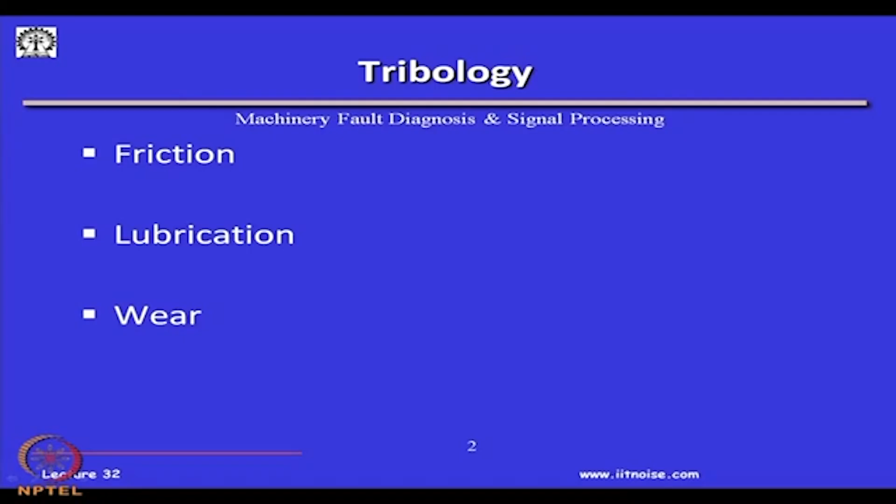As you know, tribology is the study of friction, lubrication and wear in mechanisms or machines. For example, when two machine members interact with each other, there is a normal force on them, and these surfaces may not be smooth, as I showed you in the case of bearings. They may have surface roughness.

Once these two components rub against each other due to the application of load, we put a layer of lubricant. The purpose of this lubricant is to reduce friction, because reducing friction between two meeting machine members means the forces or power consumed to move them will reduce. Friction can be reduced by closing these asperities in the surfaces by having lubricant here.

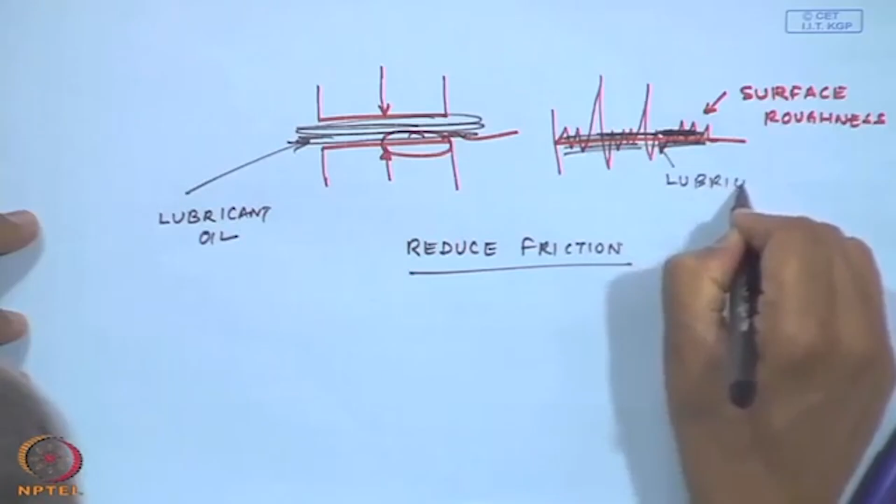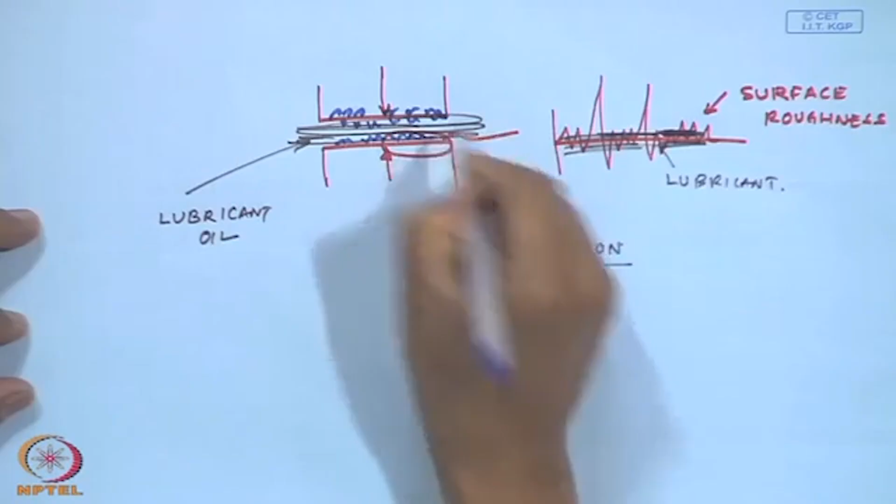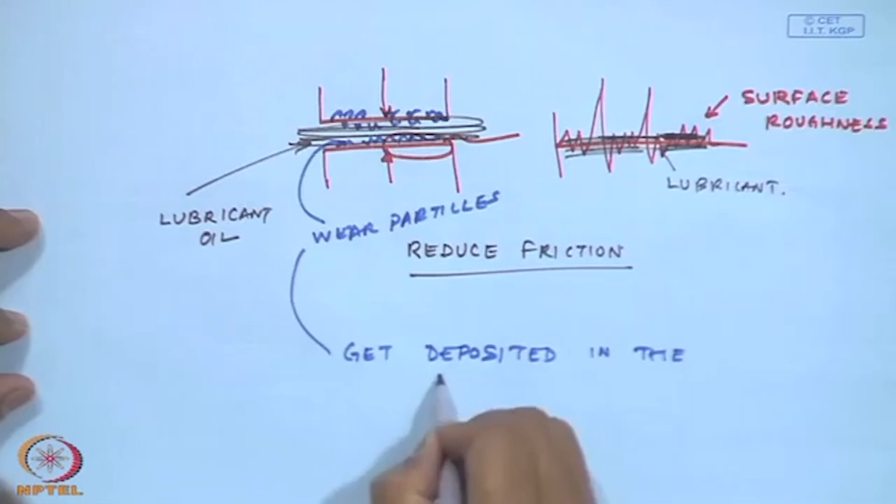But in the process, what happens? These particles also wear out because of loading, because of abrasion, and so on, and these particles get deposited in the lubricating oil.

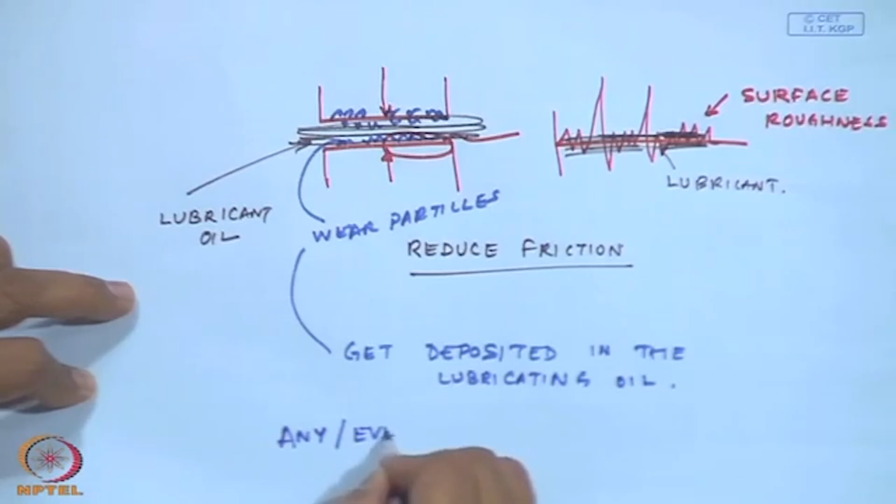So two very important things happen because of this process in any machine, in any or every machine meeting members. Example: gears meeting, shaft and a bearing, which could be a bush, journal, or anti-friction bearing.

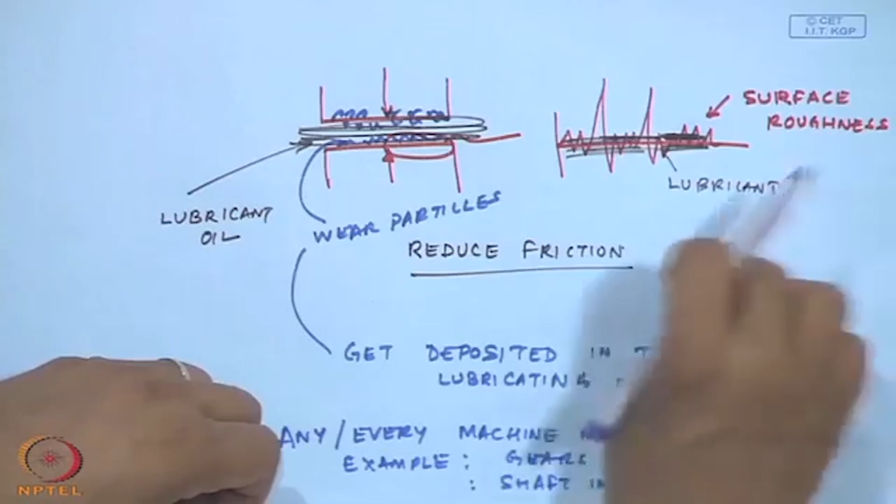When two materials meet against each other and rub against each other, there will be a lot of heat generation, and because one may be softer than the other, it is going to wear out. Like when you have an eraser rubbing on a piece of writing, those rubber flakes peel off the eraser.

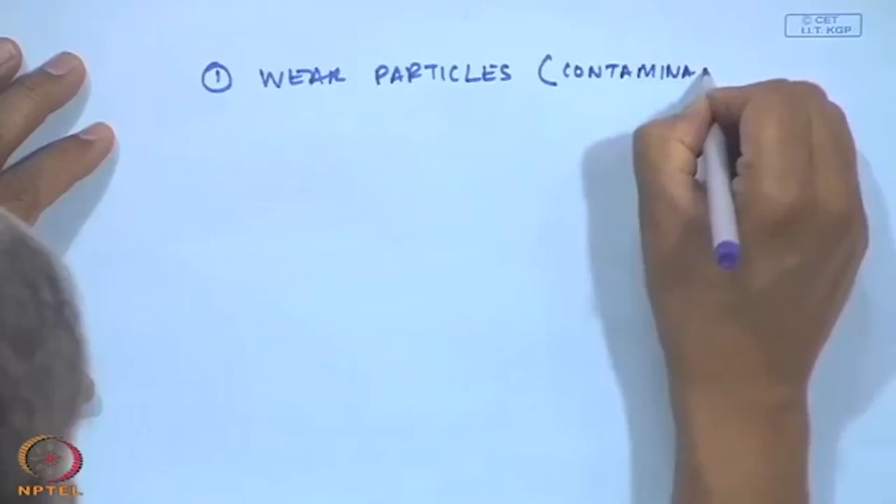So two important things happen. Number one, because of this process, the wear particles, or which we call the contaminants, get deposited in the oil.

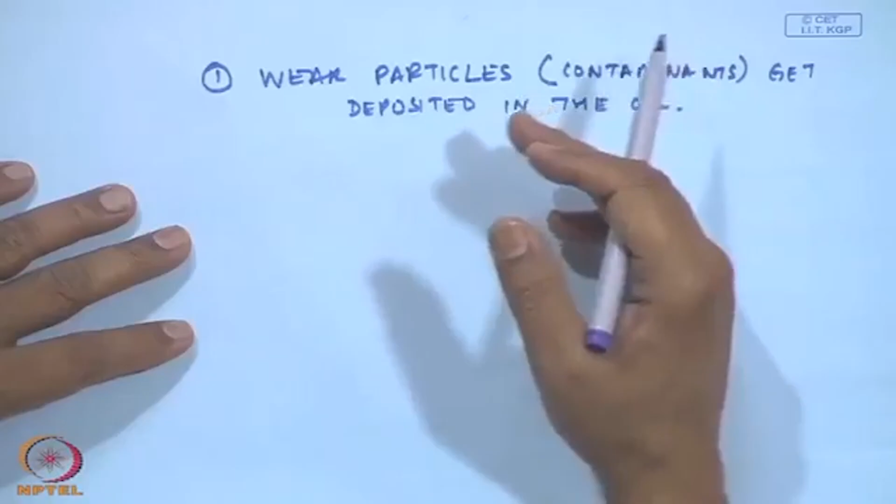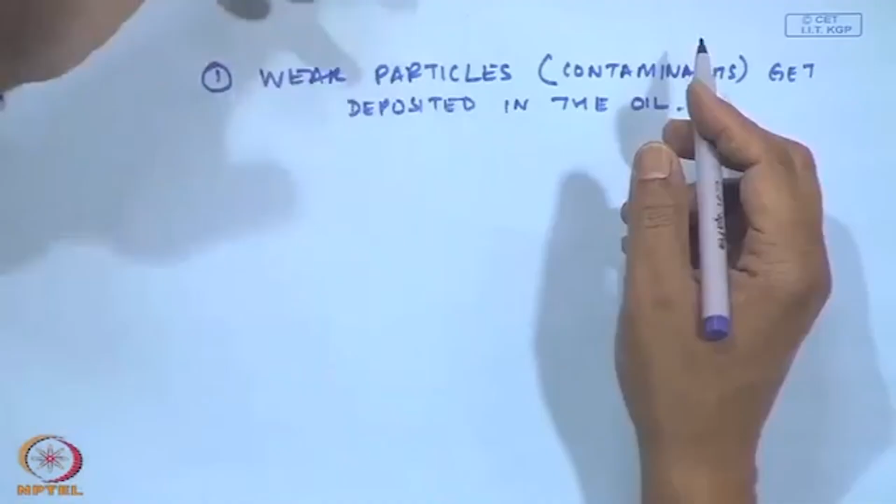The concentration of the wear particles, the nature of the wear particles, and the rate at which they have been deposited in the oil give us clues as to what is wrong with the parent material from which they have worn out, whether due to excessive load, less lubrication, or temperature effects. These are factors responsible for the wearing out of particles from the mating members.

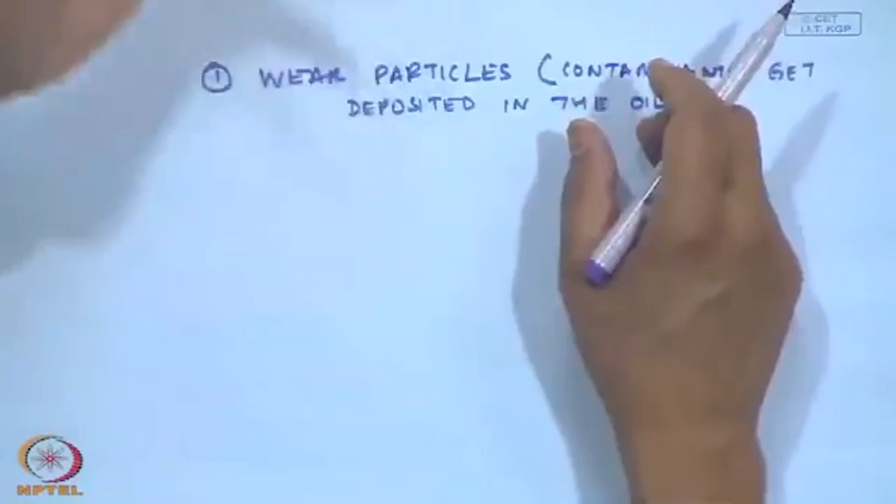Understanding where these wear particles came from, we can know whether the parent material was poorly designed, was of a softer material, did not have proper heat treatment, was not lubricated, or was subjected to higher temperature. These are scenarios we need to investigate, along with the chemical composition of the wear particles. For example, if they come from a journal bearing and we see a lot of zinc, tin, or lead, we know this bearing is wearing out faster than it is supposed to. This gives us an indication of how and how quickly the machine is deteriorating.

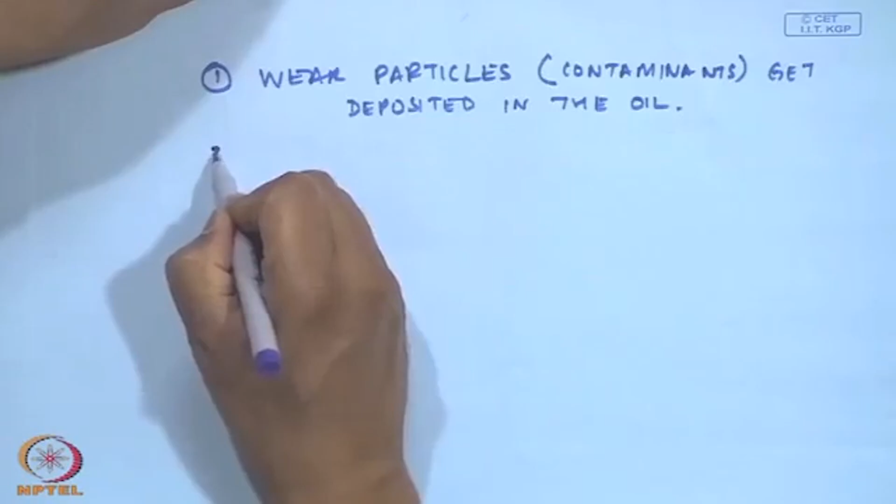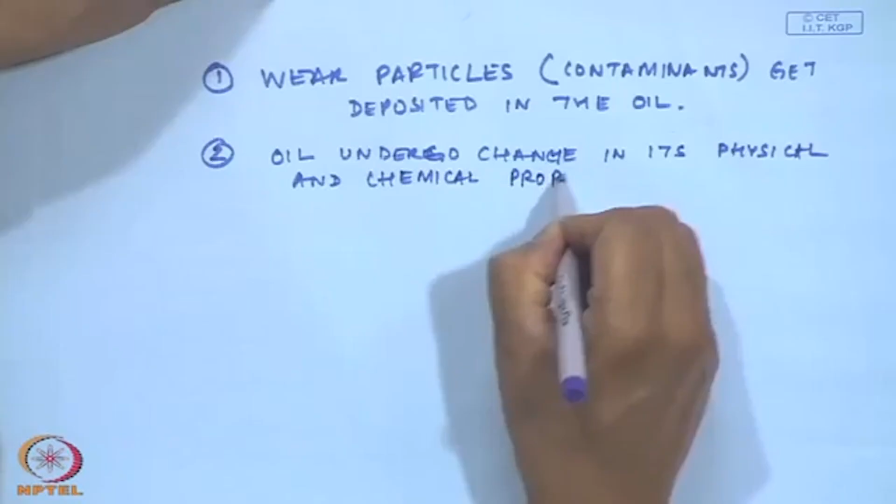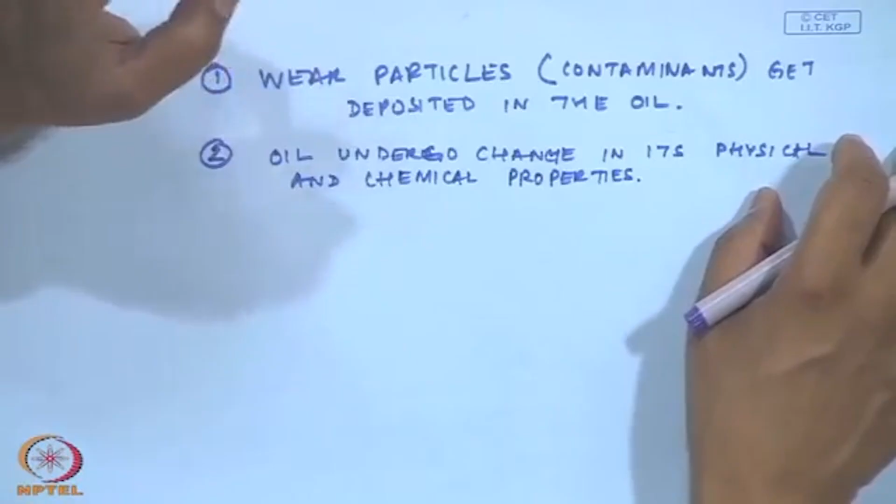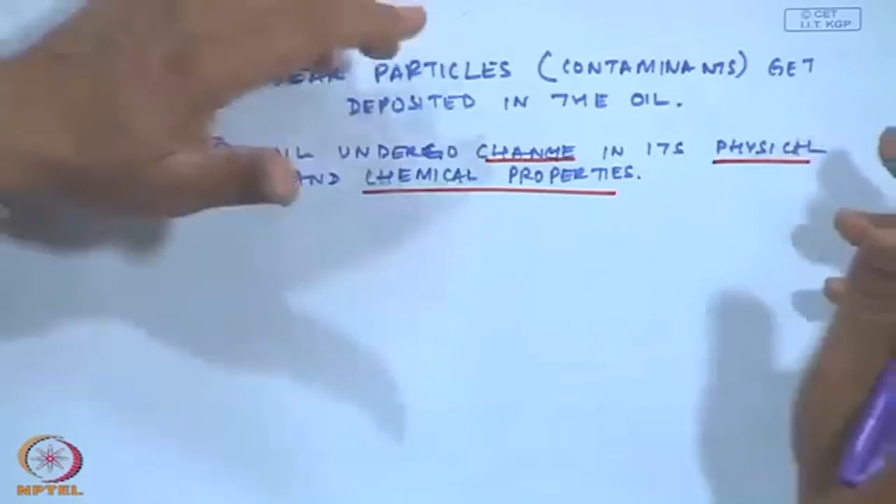The next thing that happens is, once these wear particles get deposited in the oil, the oil will undergo a change in its physical and chemical properties, because the virgin oil, the oil which was new and has not been used in the machine, has certain physical properties like density, viscosity, and oxidation number. Once contaminants get deposited in the oil, these properties are going to change. So if somebody monitors these properties, we will know that something has gone wrong with the machine.

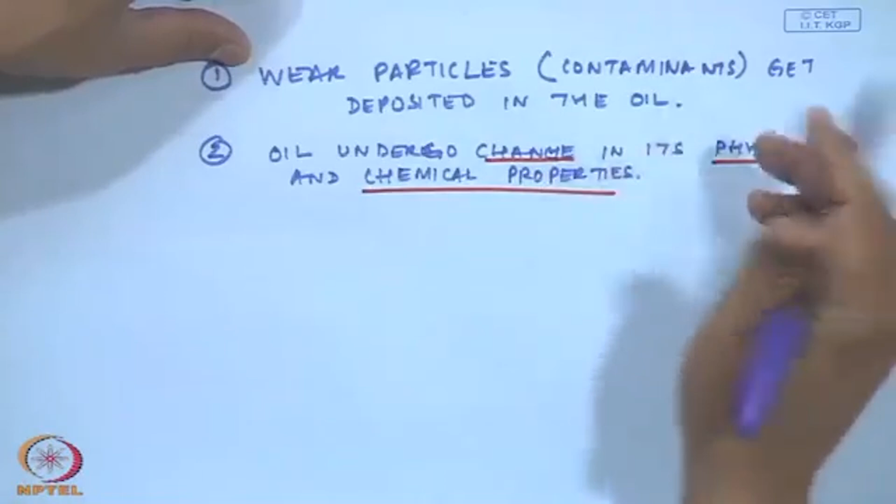This contaminant analysis, which we are going to discuss in today's lecture, and the oil analysis in the subsequent lecture, are basically like pathological tests which we do when we go to the doctor, like an urine analysis or a blood sample analysis.

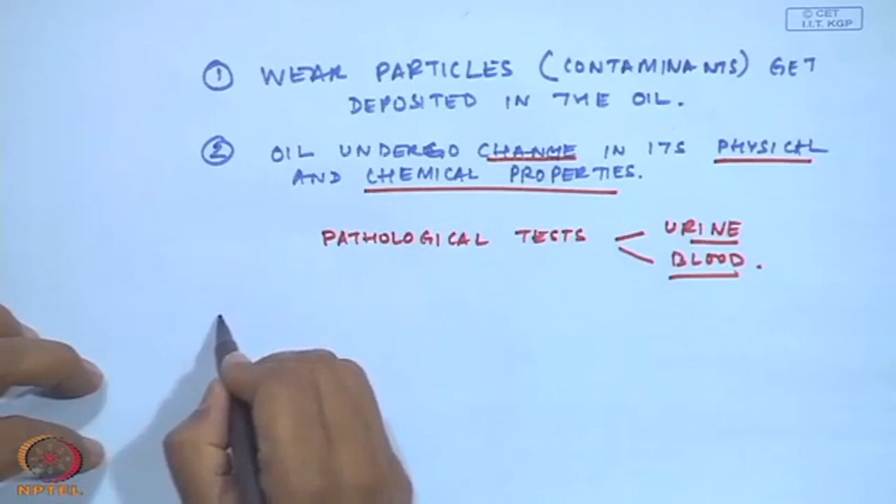Similarly, for machines, we also need to look into wear particles and oil analysis. Throughout the world, 70% of CBM, condition based maintenance, is done through vibration monitoring.

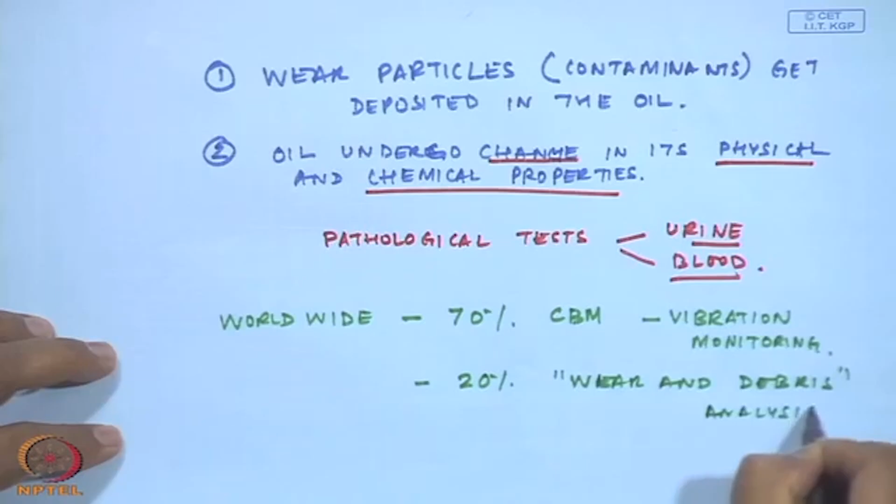These are from statistical information available in the literature. Usually 20% is what is known as wear and debris analysis, which is essentially nothing but the contaminant analysis.

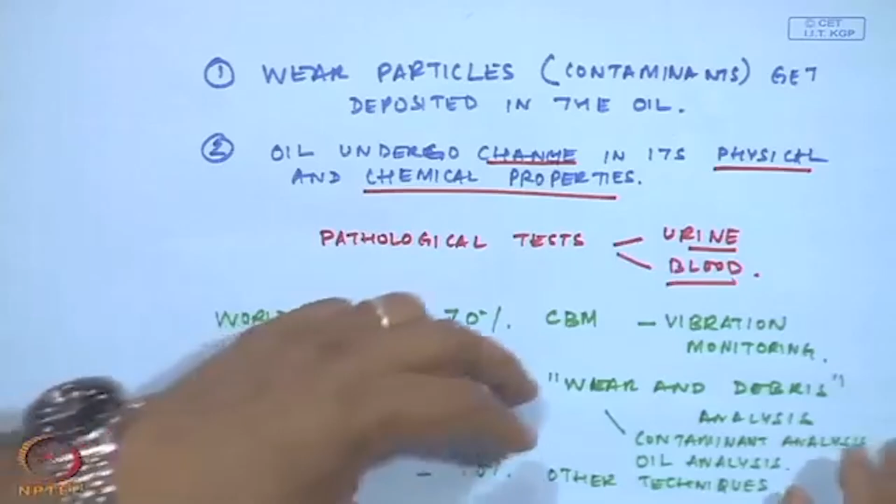And oil analysis. The remaining 10% is other techniques, and that makes it 100%.

So in this other techniques category, I have what is known as the motor current signature analysis.

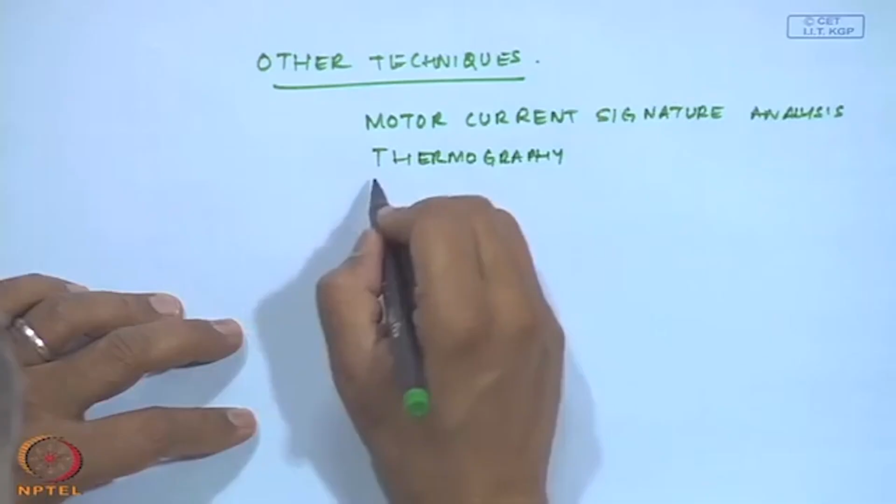Then we have what is known as thermography. Then we have ultrasonics. Some of them are non-destructive test techniques like X-ray or radiography, acoustic emission.

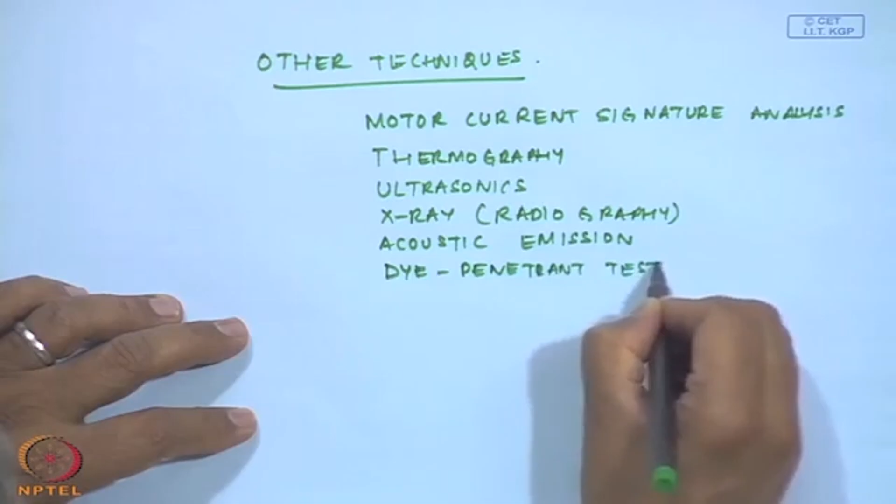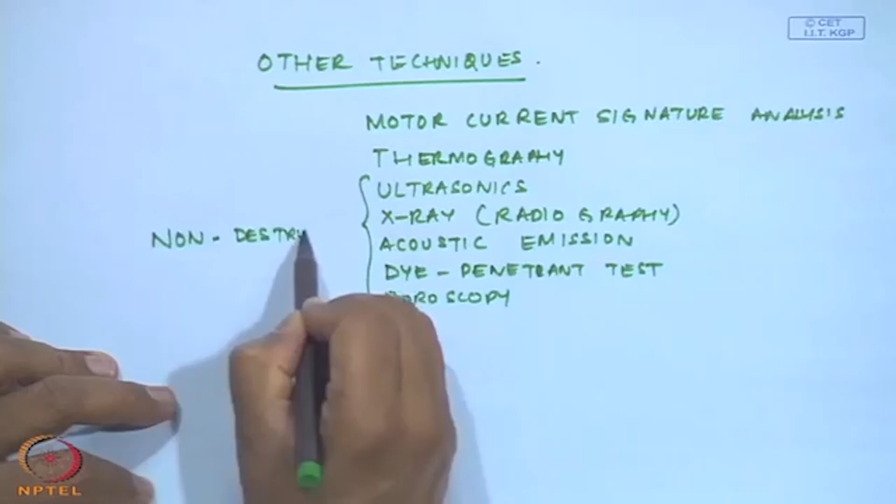Then we have dye penetrant test. Then we have boroscopy, etc. These are the non-destructive tests, NDT. So this forms about 10% of the CBM throughout the world.

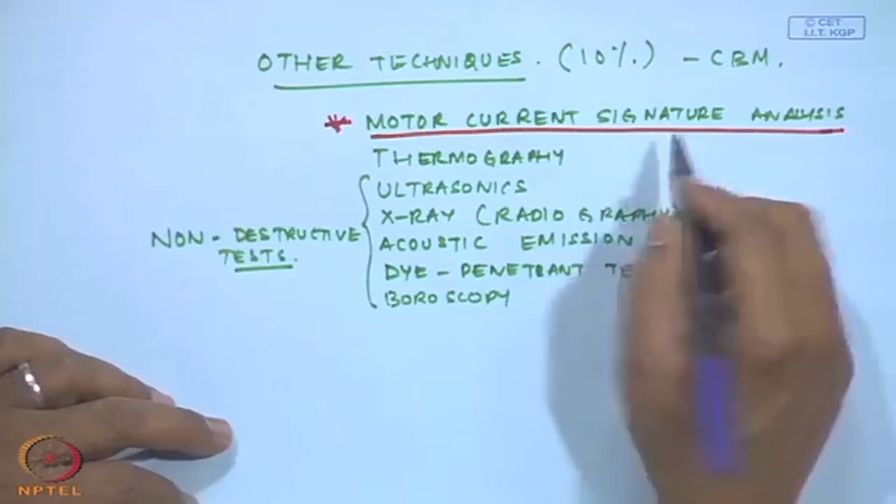Recently, motor current signature analysis has become a leading technique in finding out CBM, and we at IIT Kharagpur have done some pioneering research in motor current signature analysis to find out faults in mechanical systems using the current drawn by the electrical motor which is driving either the gearbox or the mechanical driven unit.

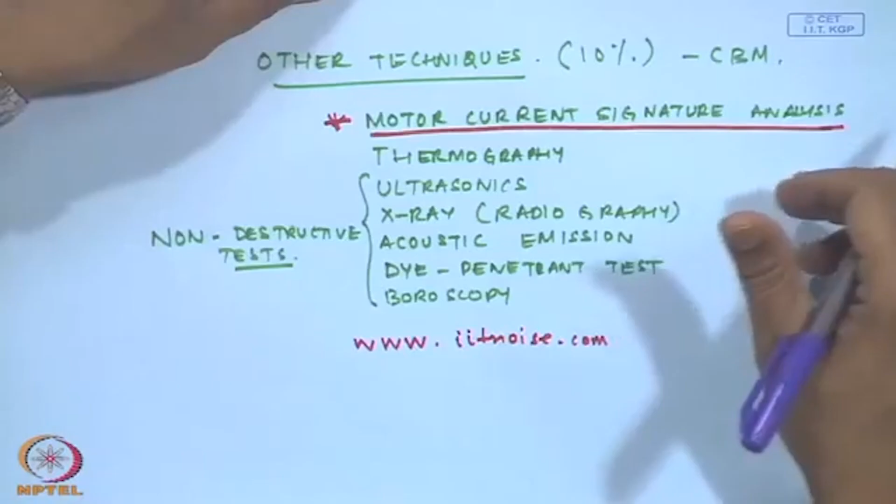Details about this research can be found on my website. And in fact, in subsequent classes we will refer you to some of the experiments and literature which we have published in these areas.

So today, as I was telling you, we will focus more on contaminant analysis in this class. With this kind of preview, let us see what this contaminant analysis is about.

As you will see here, the contaminants or the wear debris have certain characteristics. One is the quantity. If the quantity is high in a given composition, it is usually measured in parts per million, ppm.

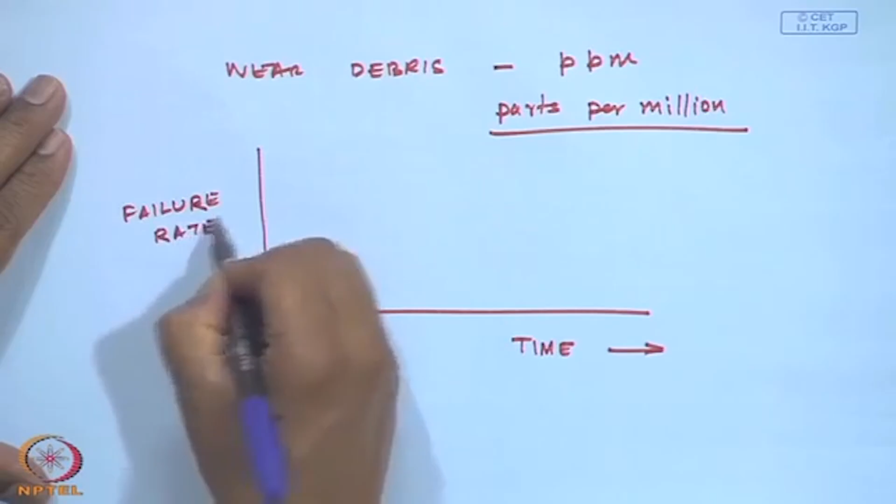If you go back to the familiar bathtub curve, you have the infant mortality zone, then the uniform failure rate, and then towards the end you have the wear out zone.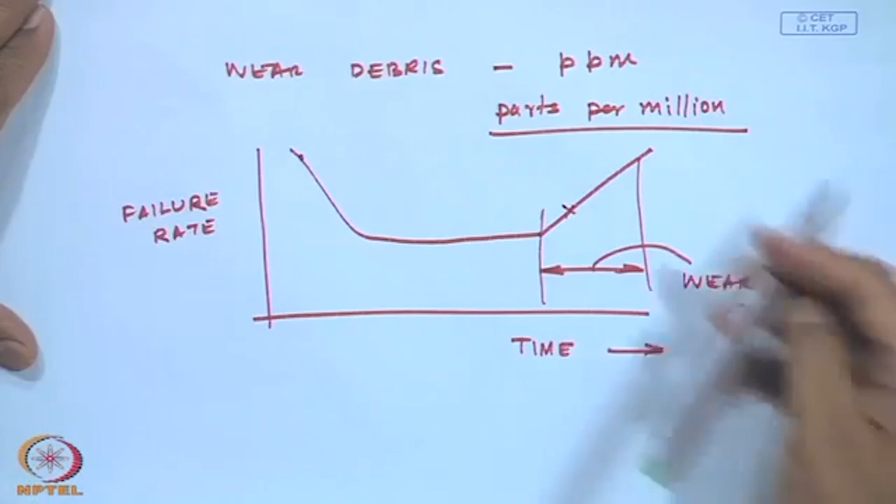What happens is, suddenly at a given time, if you see that the wear debris parts have increased, are increasing with time, you know that the defect severity has increased.

So, in the laboratory where you do the contaminant analysis -- by the way, this contaminant analysis cannot be done in situ, that means next to the machine. Unlike vibration monitoring, where you just put a transducer next to the machine and record the signal and do an analysis to tell where the fault is.

In contaminant analysis or oil analysis, you cannot do that. All you have to do is collect the oil, like collecting a blood or urine sample, and send it to a pathological lab. Similarly, you collect the oil in which the contaminants are present and give the entire sample to a lab, where they will check the severity by calculating the quantity of particles present.

For example, every month you see the ppm of, say, zinc in a machine component. So at the end of the first month, second month, third month, fourth month, fifth month, after every month you will be collecting the oil sample and giving it to a lab.

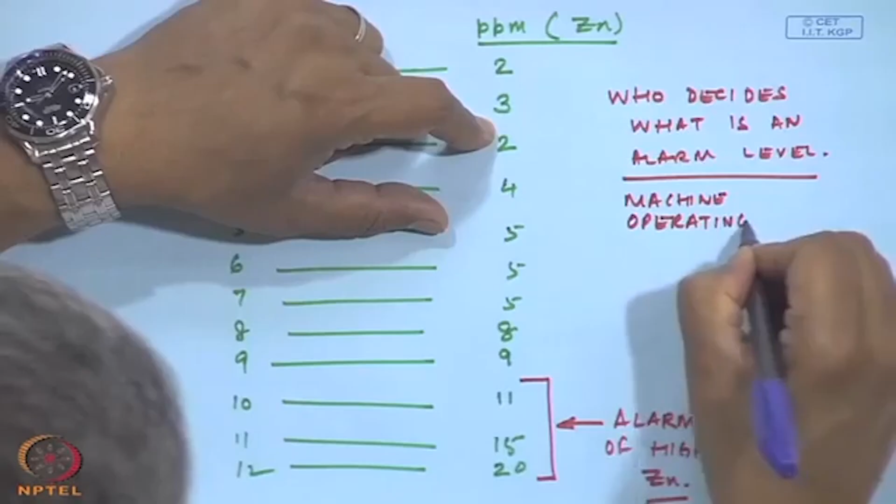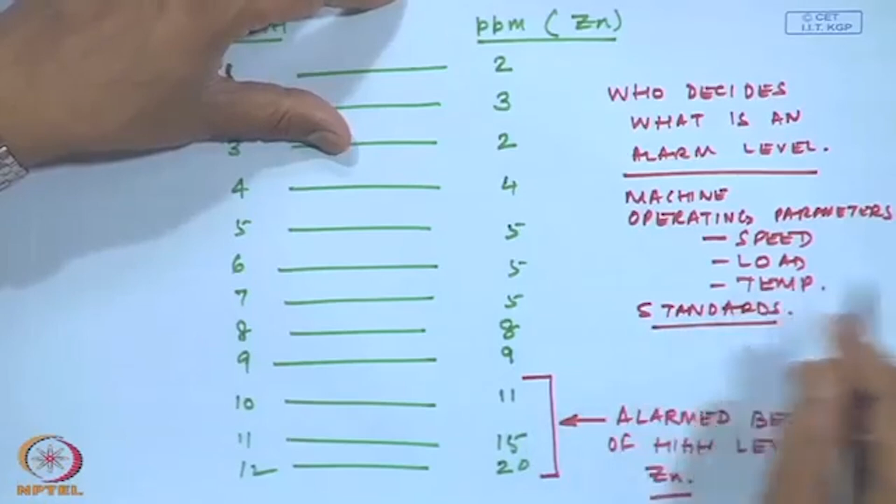Like speed, load, temperature - the machine could be a gearbox, blower, etc. For these there are standards, or industries have made their own standards based on their experience. They say if I get more than 15 ppm of zinc, I should be alarmed that the machine has undergone a severe failure. So this severity or alarm level is actually decided by the user himself or herself.

Now the next point is size of the particle. We are getting size of the particles. This wear debris comes in many forms. One could be laminar strips, one could be irregular shaped particles, one could be spheres. Some could be curled strips.

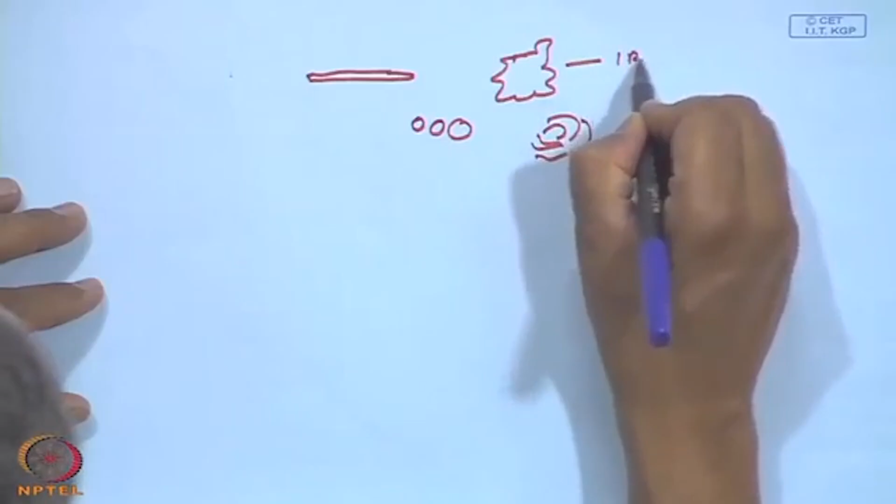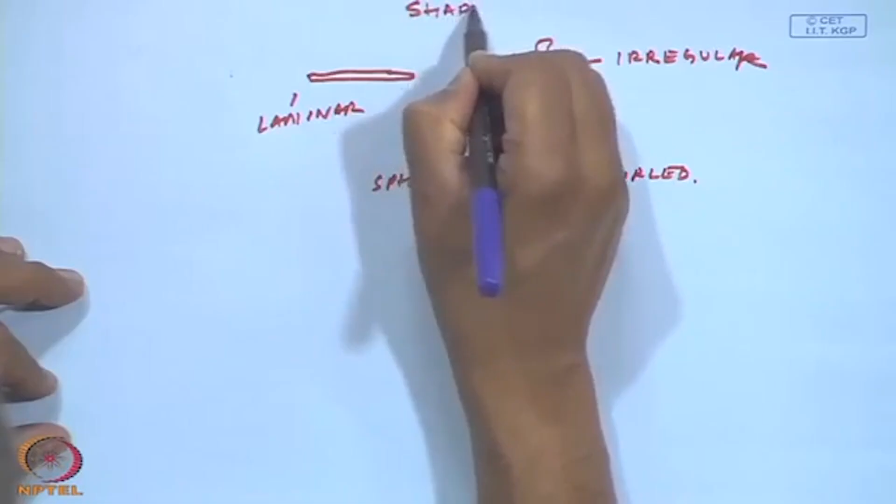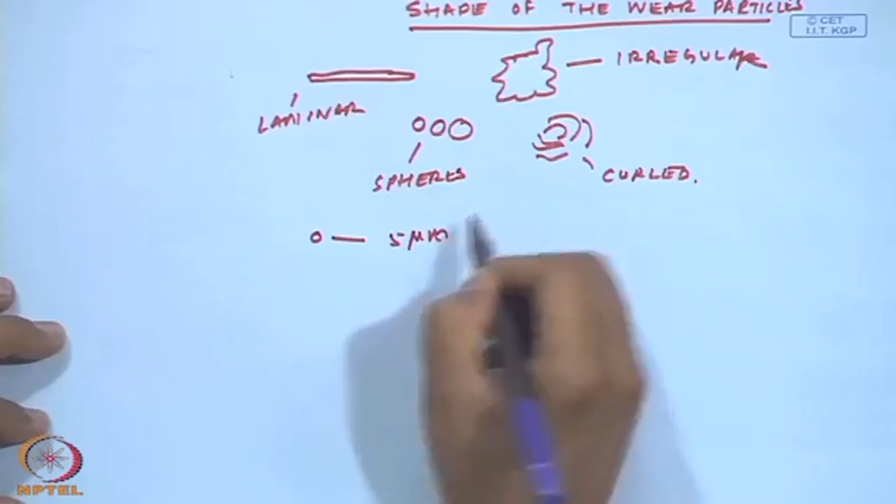Because this actually leads to the morphology of the wear particles, but the rate is very important, because what will happen, we have some having maybe 5 micron size. Suddenly, if the surface has worn out so much that I am getting large boulders, large spheres.

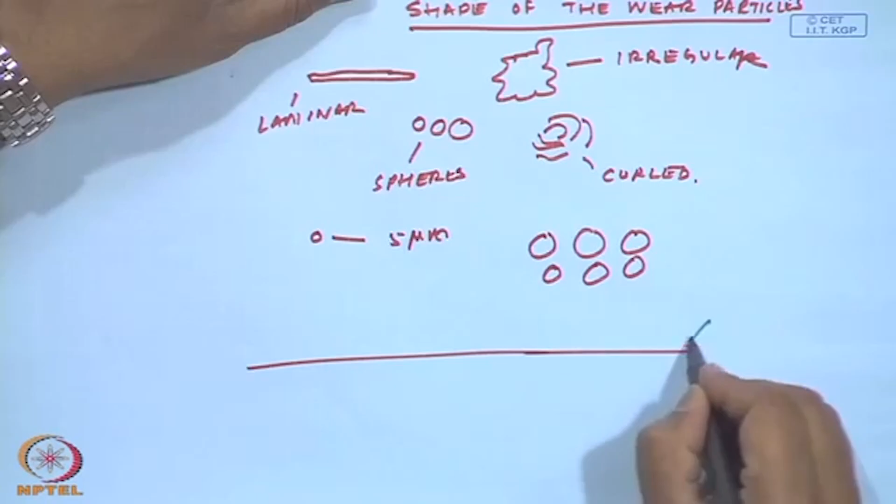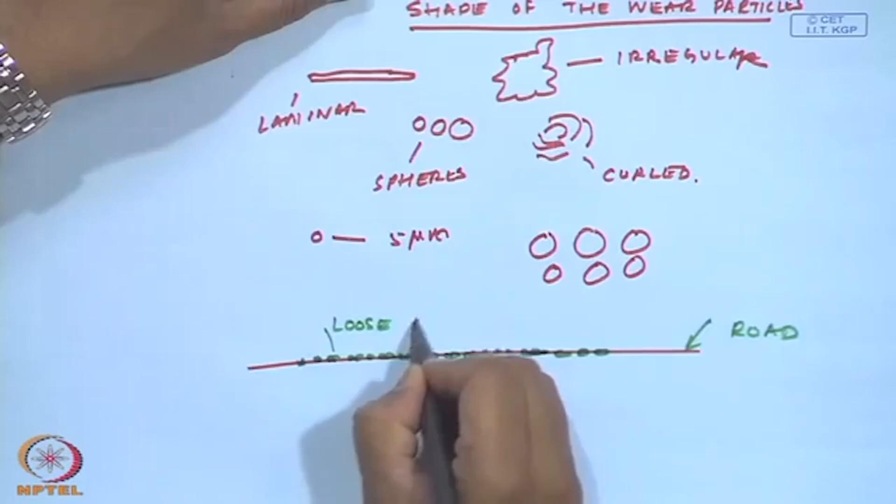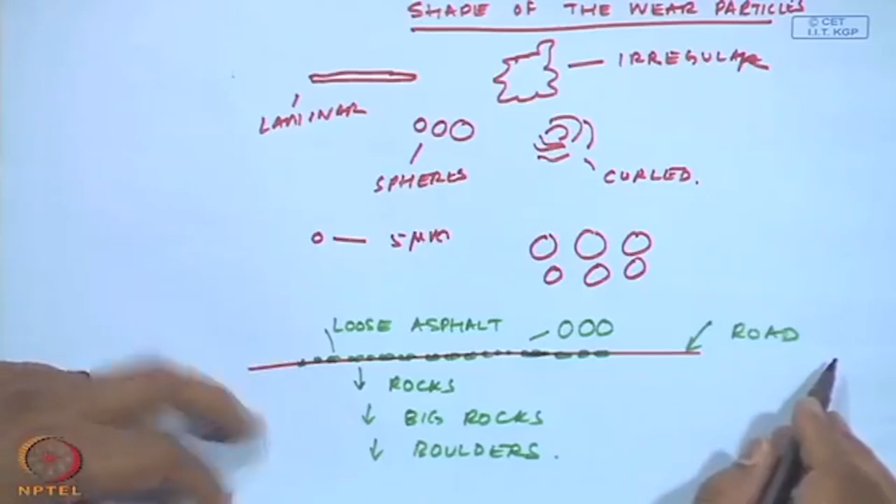A good example of this is a fresh road, nicely metaled, and then initially you have a lot of loose asphalt. With time you will see suddenly you get big chunks, big spheres, big rocks - loose asphalt, small rocks, then big rocks, then boulders coming out. If you do not treat this asphaltic road, with time, because of weathering conditions, you will initially have loose asphalt coming out, then gravels and rocks, then big rocks, followed by boulders.

Similarly, the same thing happens in machines as well. You will have small strips coming out, small spheres coming out. If it goes untreated, you will have big components coming out, big spheres, and so on. So the size will decide the rate of severity of this wear debris. With time you will see the particle size, maybe it was 5 microns to begin with, and then it became 20 or 10 microns, and so on.

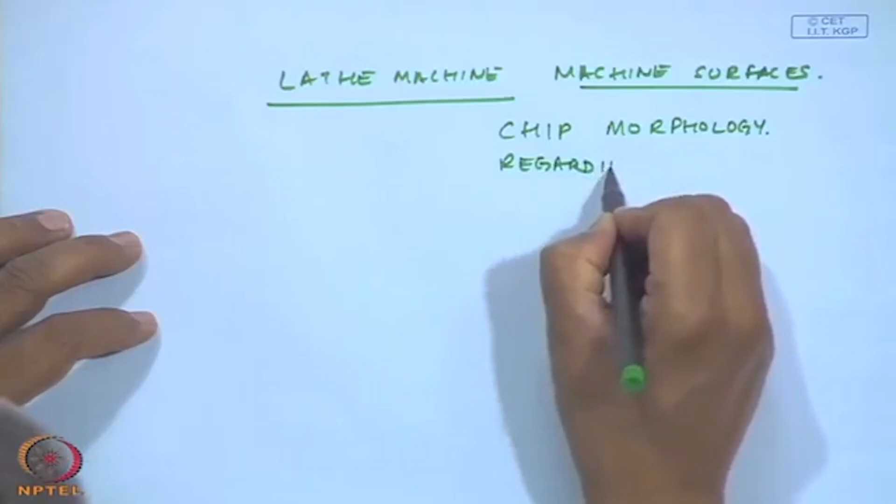Next is the morphology - the mode, whether the shape is laminar like strips, whether it is curled, whether it is sphere, whether it is irregular. You must have noticed this while you machine in the laboratory, in the workshop, when you use a lathe machine to machine surfaces. The chip morphology tells us regarding the type of machining.

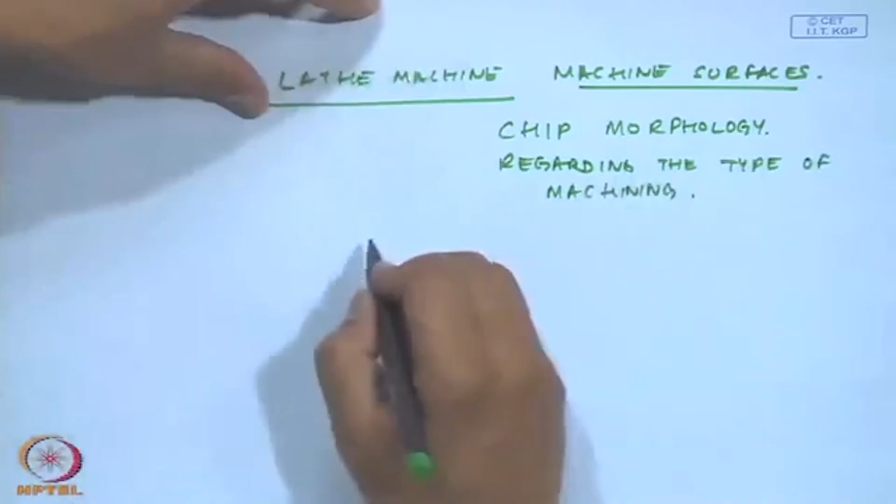I am sure all of you must have seen while you machine a mild steel specimen, you will get curled chips. When you have cast iron, you will get broken pieces. There is no continuous strip here, but here you will get broken steel.

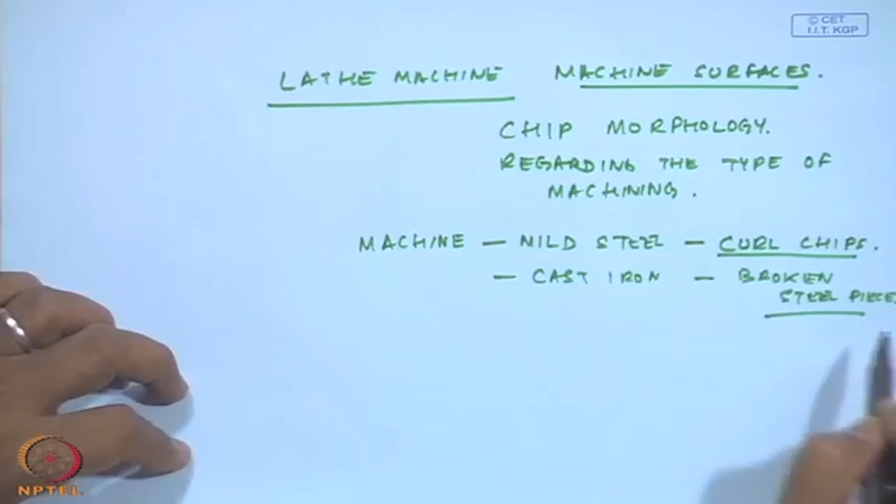So this tells us about the operation. Of course here we are making it happen, but in machines, because of wear and tear, we will get these particles coming out. Some particles could be like a sphere, some could be like a strip, some could be curled or curved, some may be having a lot of holes on them, and so on. Depending on the morphology of these worn out particles, of course we cannot see them with our naked eyes, so we need to use an optical microscope to begin with, and then magnify them to see them.

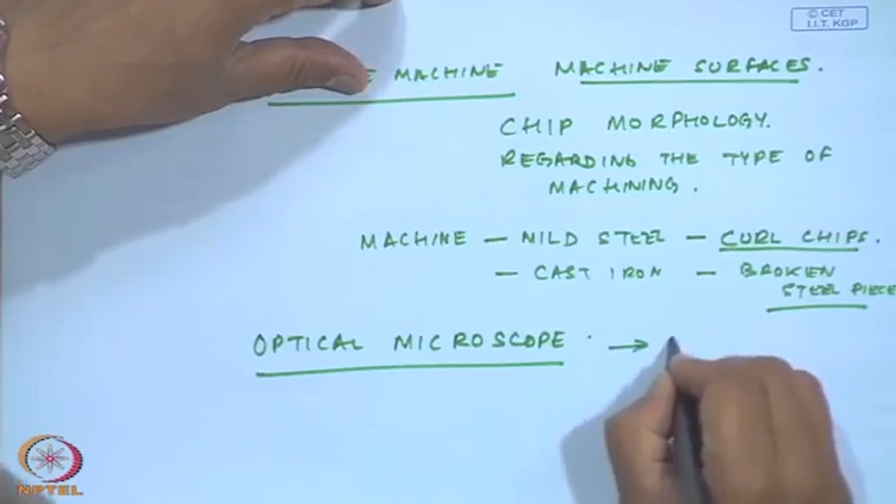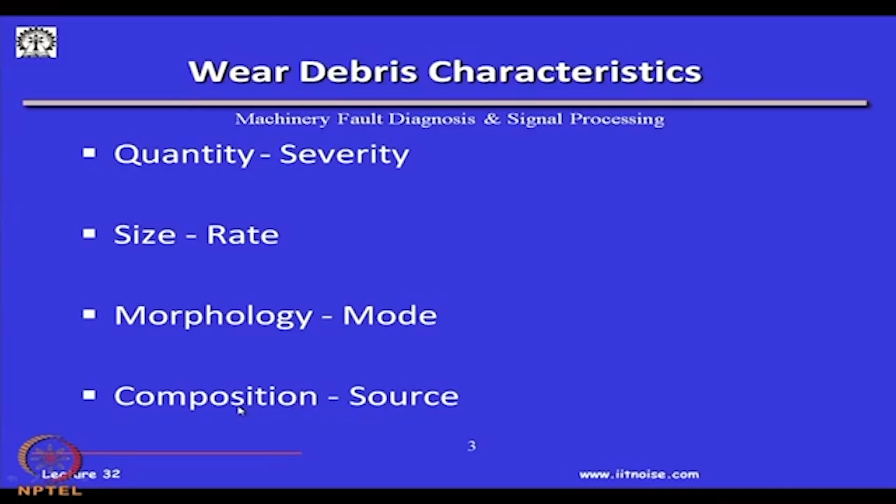And then the most important part is the composition of the wear debris particles. The composition of these wear debris particles will tell us what is the parent material in terms of composition, whether it is a lot of iron, zinc, chromium, sulfur, or silicon. We know, for example, a good example is silicon - the sand grains or the dirt actually have silica. Suddenly if in the contaminants I find a lot of silicon or sand grain coming up, I will know that a lot of foreign dirt has gone into my machine.

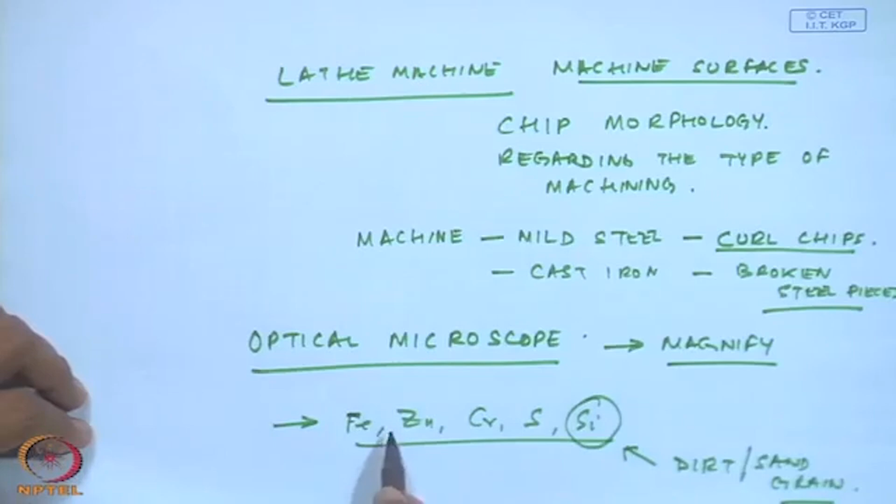So these are telltale signs. If I know the parent composition of the material and I know that in my wear particles a certain element's composition is increasing, I know in a given machine from where this particle has come out and which component in this machine is deteriorating. That knowledge will be known to me.

So these wear mechanisms are many. For example, when the particles are meeting, one may adhere to another because of temperature, because of load, and then because of rubbing they may try to pull out the surface of this material. There could be a lot of abrasion because one is hard, the other is soft, and they could act as an abrasive. This abrasion happens in normal machines, it's not that this is bad - it happens, the only thing is whether the rate at which they are happening is more, and whether I could do something to arrest them. For example, if you think of a journal bearing, the inner liners are much softer than the shaft material.

So, in the process of operation, this shaft being a hard surface is going to wear out the inner bearing surface. Now, imagine if this inner bearing surface is wearing out faster, the bearing's clearance is going to increase. As this clearance increases, the ZN by P ratio is going to change, and from the Sommerfeld equation you will see that the load carrying capacity of the bearing is going to reduce.

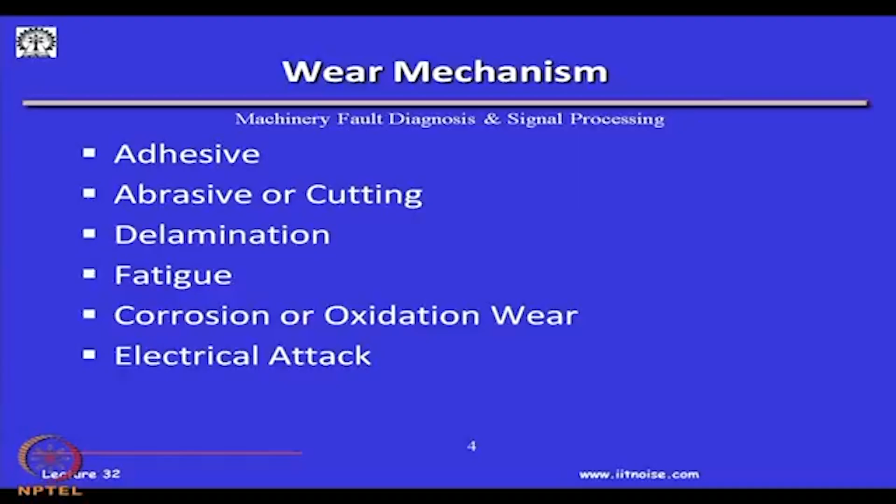Particularly think of the case of an electrical motor. There is a rotor, this carries a rotor, and of course there is a stator — I am not drawing the stator here. What happens because of this, there is always a small amount of voltage loop which is going on.

Now, at this interface there is a lubricant, either if it is a journal bearing or a ball bearing, there is a thin layer of lubricant between the inner races, outer races, etc. And this actually acts as a dielectric. So when I am bringing in a voltage across this like a capacitor, with the dielectric, if this dielectric breaks down, this voltage is going to get passed through.

So this intermittent passing of the EMF will create a spark, because there is a potential. This sparking comes with high energy of heat, momentarily. This is going to produce a lot of pitting on the surface, pitting on the bearing surface. I will show you in the next class some pictures of what happens when bearings pit. So a lot of pitting marks will come on the walls of the inner race or the outer race, because of an electrical discharge going through this circuit.

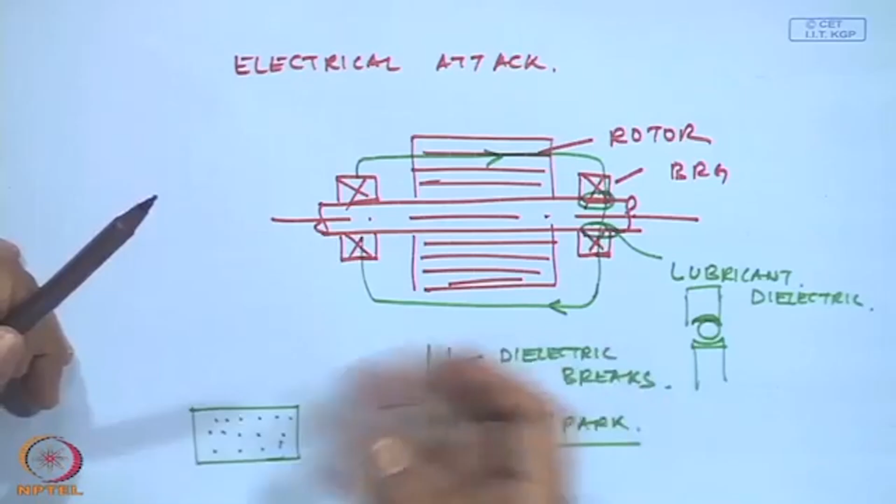The usual way to avoid it is to have a good grounding. If you ground it, this does not happen. I will show you some examples. But these are responsible for the initiation of pitting, and once the surface has got pitted, because of load and temperature they are weakened, and with time this small pitting will become large, and scuffing will occur, and then large chunks of material are going to get eroded. So the surface is going to get worn out again.

So one has to be very careful when designing electrical motors, or particularly when you have high voltage electricals in your machinery, wherein there are parts with lubricant and then a discontinuity of contact. We may not get a voltage as we measure it, but when they are going at high speed, because of this EMF, if the grounding is not proper, we will get sparks, and these sparks are responsible for erosion, like an electrical discharge machining effect occurring. In fact, people use these high voltage sparks in electrical discharge machining to machine surfaces, but here the same EDM effect may be harmful to our machines.

But these wear modes — when we have the initial infant mortality zone of the bathtub curve, you usually have running-in wear modes, because maybe it was not properly aligned, maybe the surfaces had a lot of bad surface finish, a lot of the machined surfaces were not clean, and these debris were there. This is then followed by a steady wear, and then we have the wear out towards the fag end of the life of the machine. We will have severe wearing out, followed by pitting, and if pitting goes unnoticed, we will have large materials coming out, which is known as scuffing.

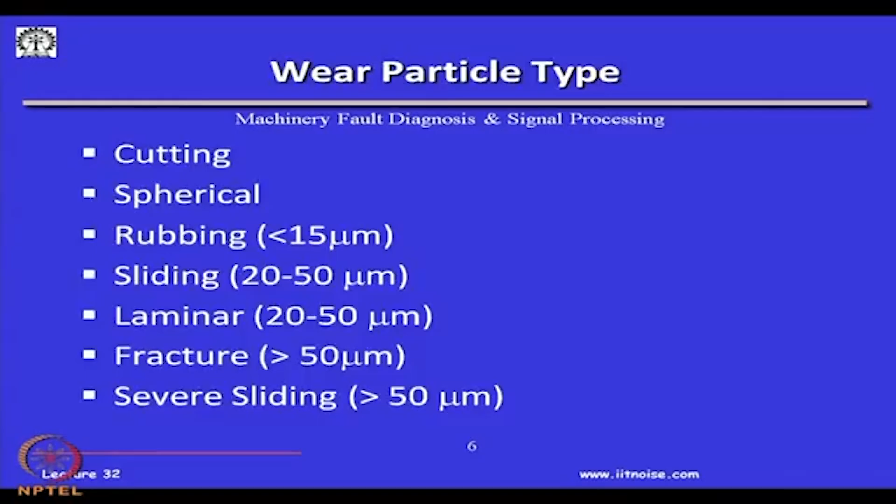So what we do basically, there is a technique. Now if you look at this contaminant analysis, depending on the size of the particles, we can have different modes of investigation.

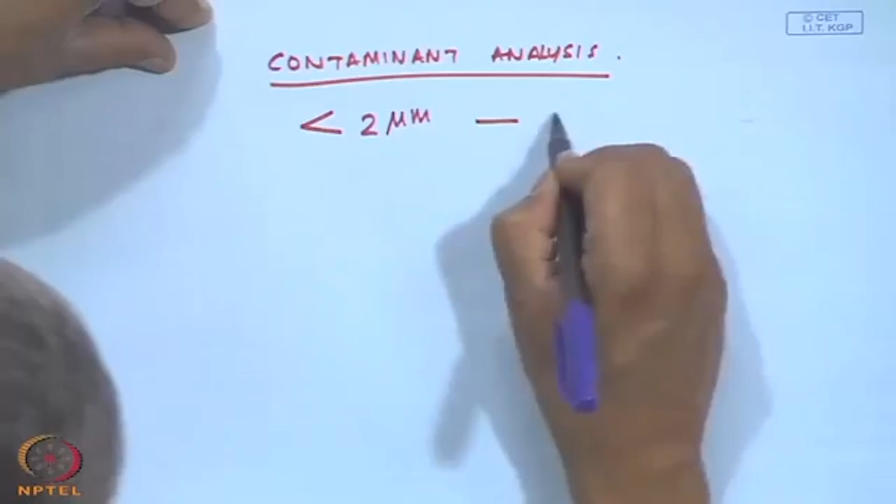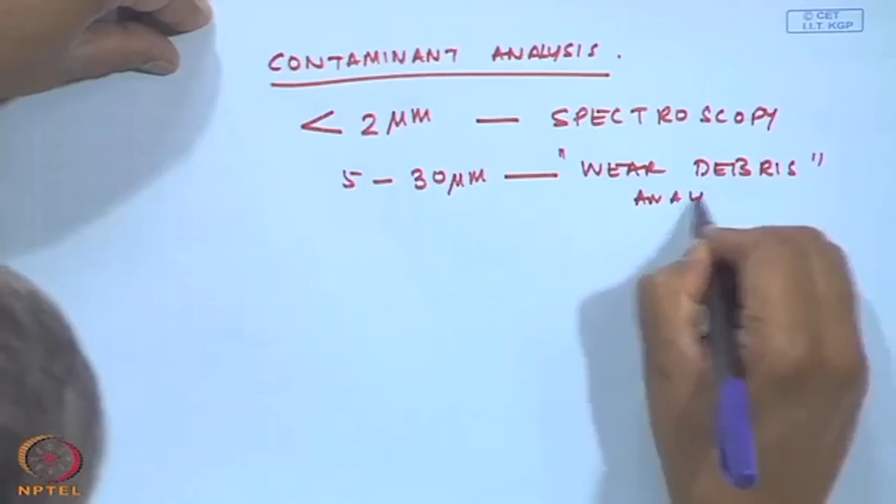If the particle size is less than 2 microns, I will use what is known as spectroscopy. If it is between 5 to 30 microns, I can use what is known as wear debris analysis. And if it is greater than 30 microns, I can use what is known as particle count.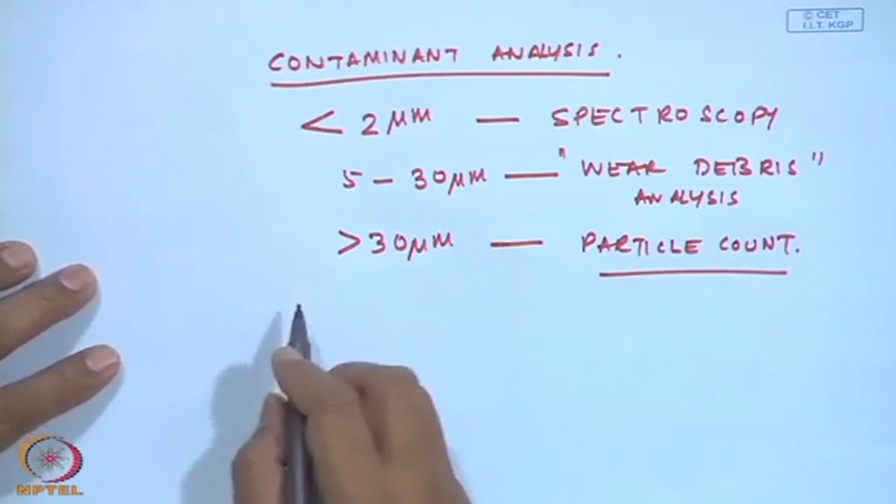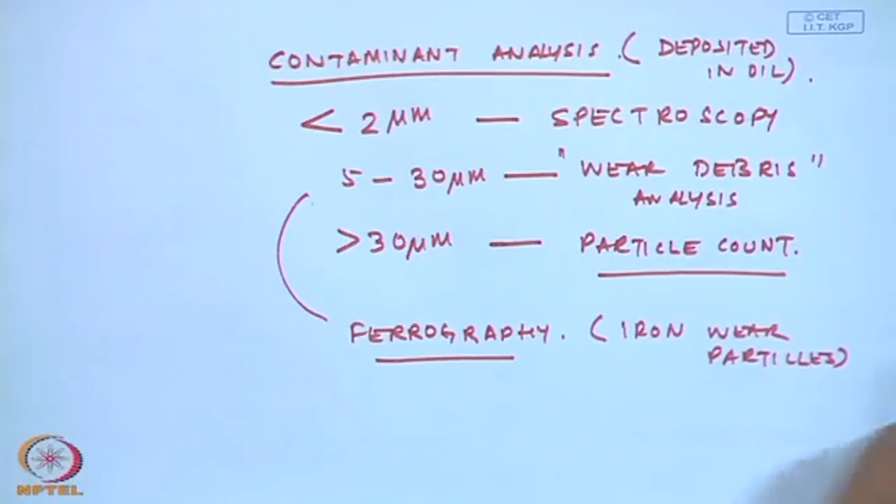And usually there is a method known as ferrogram or ferrography, wherein we have iron wear particles. So actually all these contaminants are deposited in oil. Basically, the lubricating oil which is there between the two mating members is used to understand these contaminants. This oil can be taken, dried on a piece of paper, and then with a magnetic field or a gravity field, it can be laid in such a way that the heavier particles get deposited at the bottom and smaller particles on top.

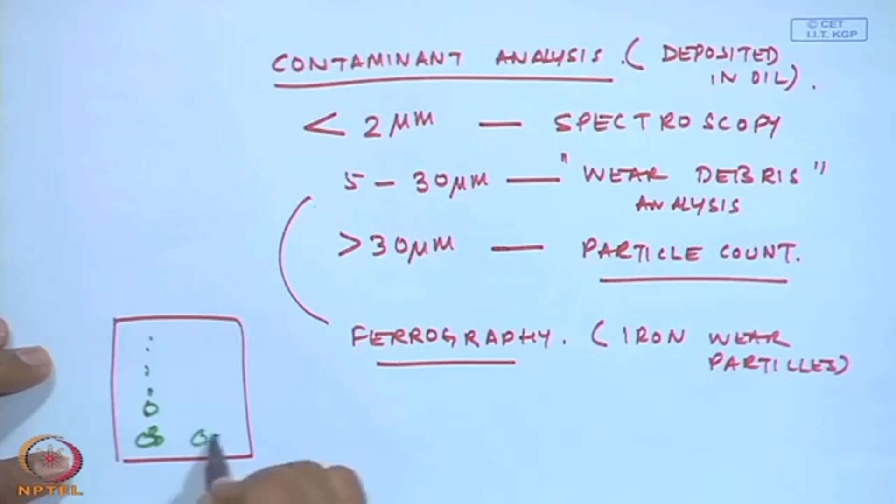This could be large particles, and then toward the end it will be small particles. This is the ferrogram, and with the ferrogram you can measure, you can see it in a microscope and see the nature and size, and also then try to understand how severe your wearing mechanism is.

So if we look at the characteristics of wear particles in a ferrogram: usually normal rubbing wear occurs as flat platelets less than 15 microns. If the wear becomes severe and sliding, you will have flat elongated particles greater than 20 microns with striations, lots of striated marks. Cutting wear produces long curled strips of metal which you must have seen in your workshop. Gear wear produces flat striated particles. Bearing wear produces laminar platelets.

Spheres are small particles less than 5 microns. Black oxides indicate insufficient lubrication. Red oxides indicate water contamination. Corrosive wear occurs because of heavy concentration of fine particles. Aluminum wear produces white metal particles. When there is dust or dirt, it's a foreign particle or material not characteristic of the machine or oil.

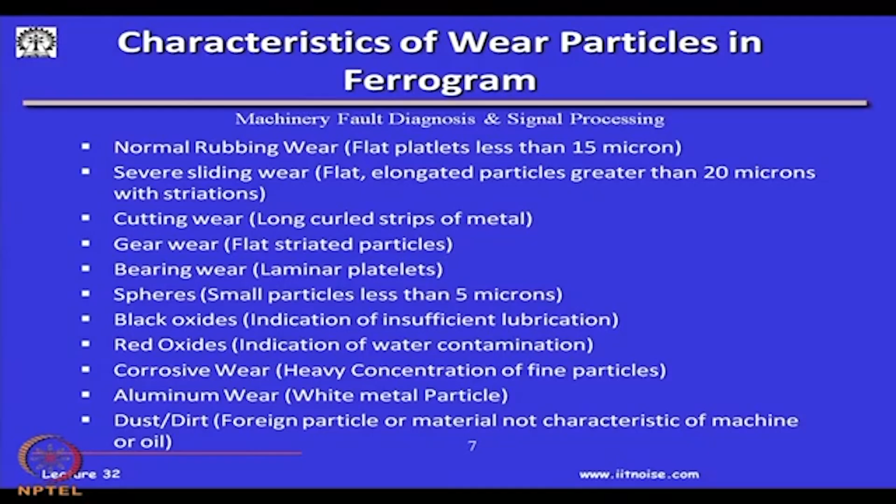So what happens is these are the particles which we see at a macroscopic level under an optical microscope, and just by looking at the size and shape, we can have some clue as to what kind of wear took place, what kind of contamination took place - is it water contamination, or contamination with dirt or sand in your machine. This can be done, but this analysis never tells us about the chemical composition of these wear particles - whether it is made of iron, how much parts of copper is there, how much parts of zinc is there. For that, we have to do what is known as spectroscopy.

Before I go into spectroscopy, I will tell you some of the wear debris analysis methods. Basically, wear debris analysis is done for particles which are above 5 microns and beyond, so I could see it under an optical method.

I can have a light beam pass through an oil which has these particles, and because of the density of the particles increasing, this light is going to get reflected, and this can be detected by a photo detector. So the intensity of the light reflected back gives me a clue as to what percentage of opaque particles are there in that oil. So in a given milliliter of oil, I can have an estimate as to how many parts per million of solid substances are there.

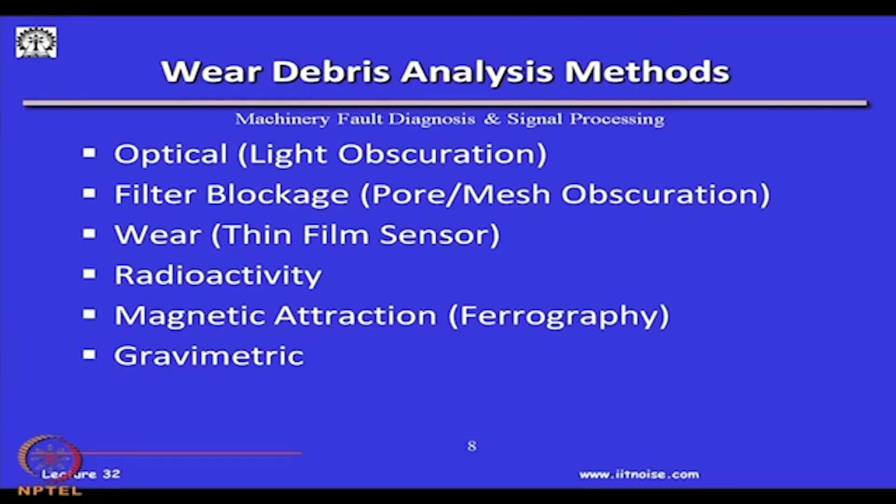Wear particles can also be measured through radioactivity, through thin film sensors, magnetic attraction via ferrography, or the gravimetric method which I just described in the last slide.

But to know the chemical composition of wear particles, we have to use spectroscopic techniques for debris analysis. These debris have to be sizes less than about 2 microns, which are not possible to see with the naked eye, even with high power magnification of maybe 100,000x you may at most see about 5 microns. Beyond that, for these fine particles, we need not count the number of parts per million but rather find out the chemical content of these particles, and that is done through these techniques.

These are specialized equipment like the atomic absorption spectrophotometer known as AAS, atomic emission spectrophotometer AES, XRF, inductively coupled plasma ICP, DCP, EDX, etc. These are very sophisticated equipment.

Each of these equipment could be costing anywhere from 50 lakhs to 2 crores. So obviously, when I have a plant with a gearbox worth only 50,000 rupees or 1 lakh rupees, it will not be economical to have all these machines in my plant. In fact, none of the engineering industries have these for regular plant operations.

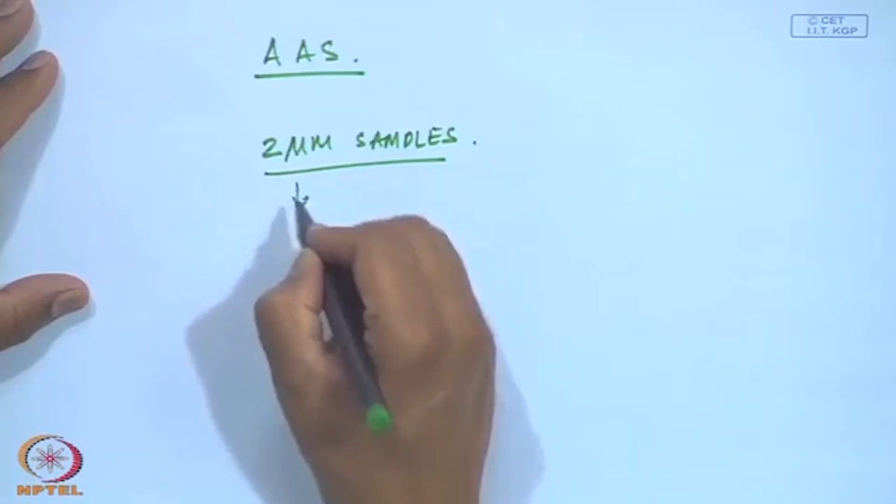What happens is these 2 micron samples are heated to such a high temperature that we get plasma coming out of it. Then, from Planck's law of radiation, E equals h nu, and this energy which is emitted is at the wavelength or frequency of the radiations of the chemical elements present in these wear particles.

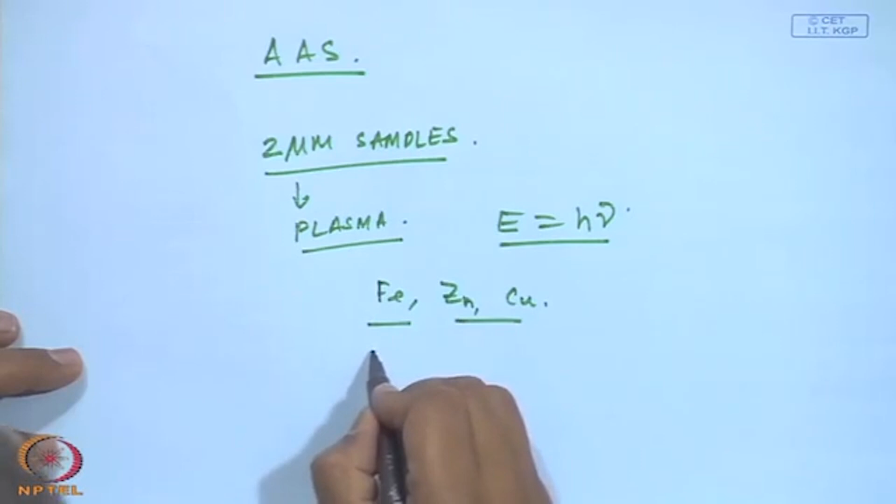For example, suppose it has iron, zinc, copper, etc. The radiation of these elements, of these atoms, electrons in iron, if it goes to an excited state, it radiates at a particular frequency. Same is true for zinc and same is true for copper.

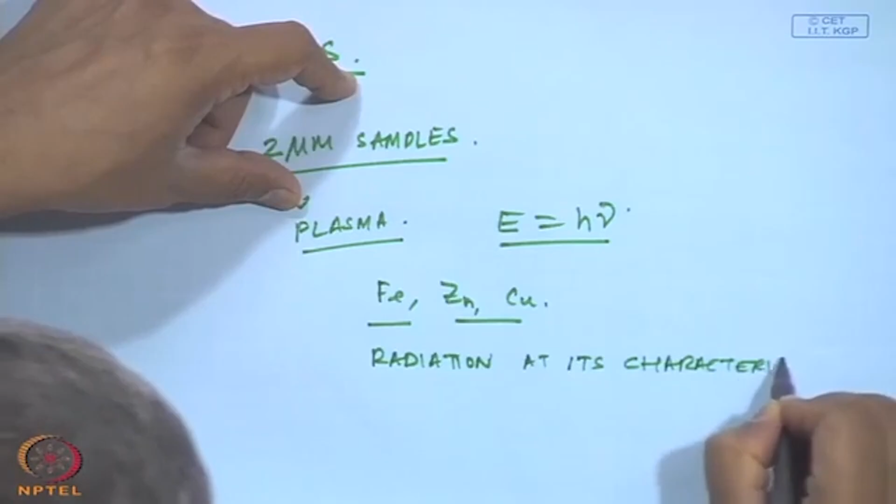Radiation at its characteristic frequency - so all I have to do is measure the intensity of the radiation at that characteristic frequency, and that is done through an atomic absorption or emission spectrum.

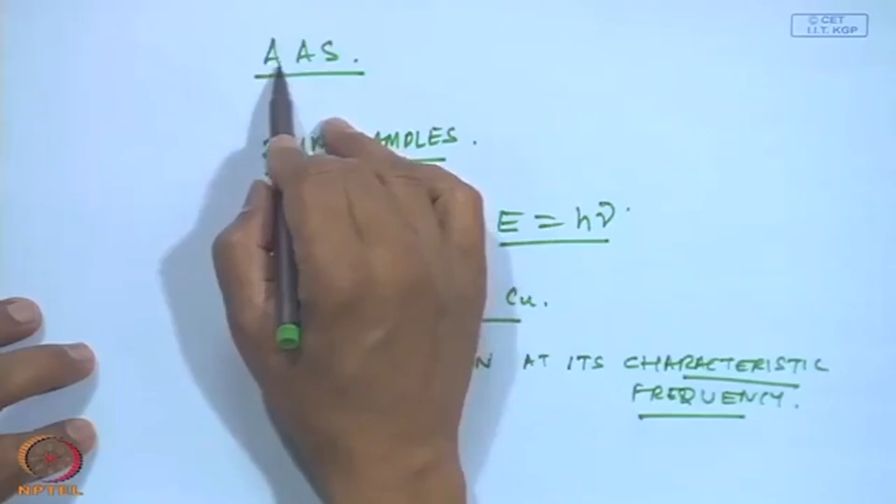So basically I have a sample which is heated and radiations are produced. I will have another source from a known concentration, so I know some x ppm and the amount of light intensity. I then measure the unknown light intensity radiated out of this element, and by the unitary method find out what the ppm is.

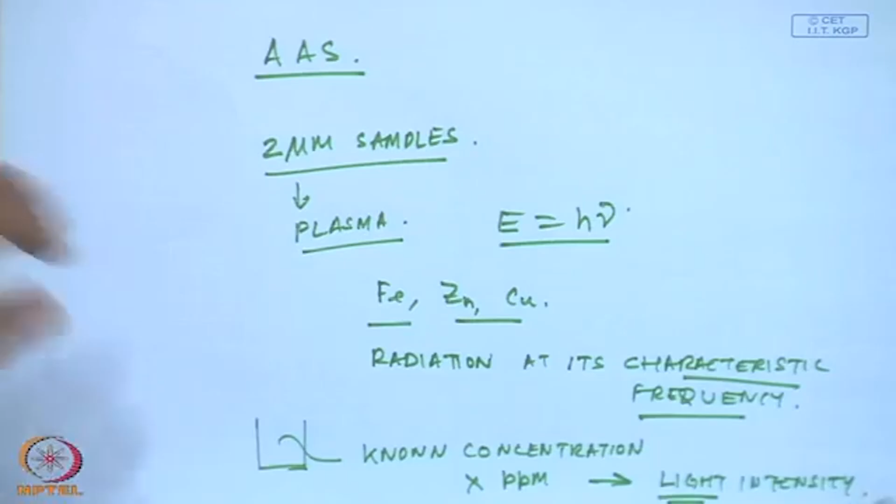So I need to know, for the particular element I am trying to identify, its electromagnetic radiation frequency. There are oil standards and standard light sources used to identify the chemical elements.

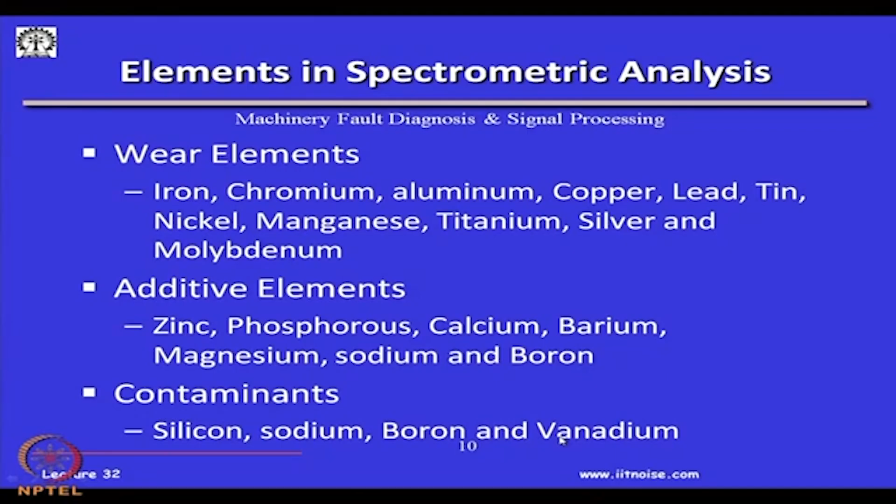Typically the elements in spectrometric analysis, the wear elements, are usually iron, chromium, aluminum, copper, lead. Sometimes we have certain additive elements, and the contaminants are usually silicon, sodium, boron and vanadium.

These will be known to us from the original designer, so we know the material of the element and can look out for these. Sometimes, in many machines available to us, the material composition is not known to us.

Sometimes it is a difficult thing, but with experience, if you see a particular component coming out, we can do diagnostic measures to find the source of this material. This is only possible by spectrometric analysis, wherein copper is usually coming out of bearings, lead is also coming out of bearings, and everything in the industry is made out of iron, and silver particularly in wrist pin bushings, anti-friction silver, solder, etc. This gives us a clue as to the possible source of the element detected by spectrometric analysis.

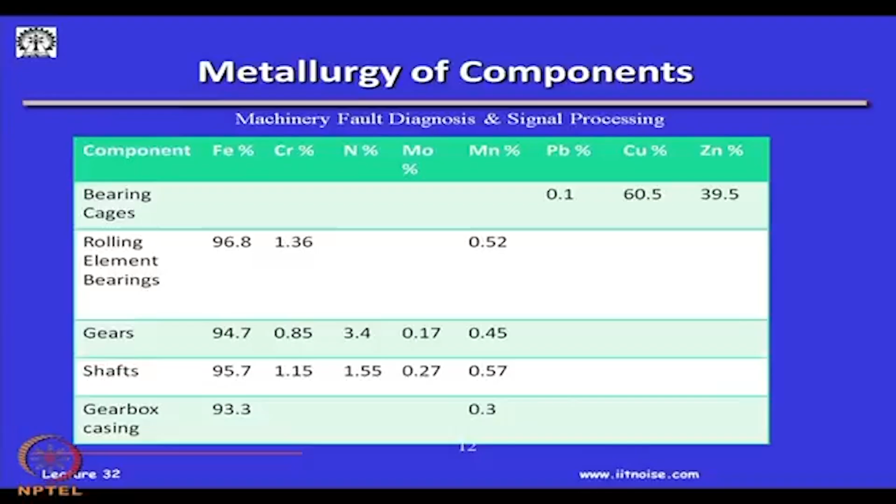So, to summarize this class on contaminant analysis, you have seen the different types of contaminants available. Contaminants can be distinguished in terms of their size. Something less than 2 microns, we cannot see through a very high power magnification of 1000x. We have to do spectral analysis.

The spectrometric analysis is done through atomic absorption spectrophotometer or emission spectrophotometer, XRF, ICP, etc., wherein we get to know the chemical constituents of the particles—how much percentage of iron, copper, zinc, lead, nitrogen is there. All we have to do is, at regular frequent intervals, check the chemical composition of the wear particles. I am not asking you to scrape off material from the machine, but to look at what is already deposited in the oil which is used as a lubricant.

So then from these contaminants we can get a clue as to the parent source and why this is wearing. Next comes the size—bigger sizes about 5 microns or greater—we can then look through a microscope. We can see the size and shapes, whether they are laminar, spherical, curved, whether they have striation marks, whether they are irregular in shape, or cut shape.

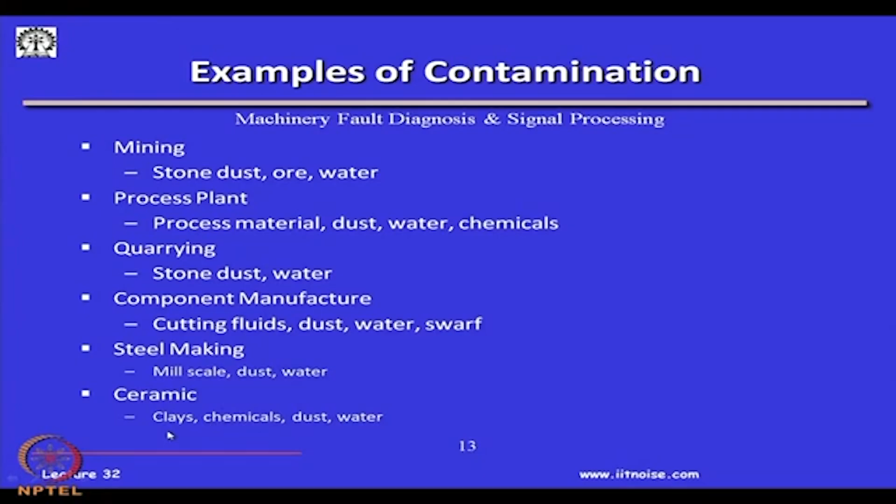And examples of contamination, just as a closer: in mining, usually it is stone, dust, ore or water. In a process plant, it is process material, dust, water—a lot of water comes in this mining process plant and quarrying. In component manufacture, ceramic, you will have a lot of clays and chemicals. So this also gives us a clue as to what happens. Okay, thank you.